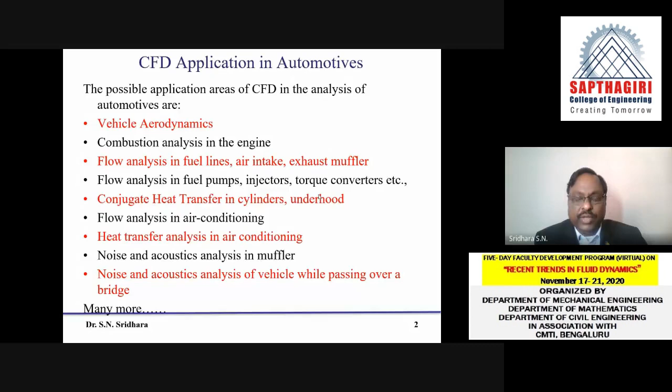I will take one by one. Now coming to what is called the vehicle aerodynamics. When I say vehicle aerodynamics, whenever a vehicle is moving in air, the interaction of the air on the body will create a lot of these things. What are those which we can actually estimate through the vehicle aerodynamics?

The first one is coefficient of drag on the vehicle. This actually says how much of the force is acting backwards, means it is pushing it backwards, and that particular drag force, when we say coefficient, I'll define coefficient a little later. This is the one we assume that air is pushing it backwards. The moment the vehicle moves forward, that drag coefficient can be determined.

The location of aerodynamic centers like center of pressure, center of positive and negative lift force, center of drag force, etc. This is something all of you will understand. Suppose I take an object and I say the mass acting at point M called CG, and we assume that is an imaginary point through which the mass is acting downwards towards the ground.

Similarly, whenever a body is moving in air, you will find that there is some pressure distribution on the body. This pressure distribution, when you take the center point of all of them and put one resultant force, it will pass through a particular center that is referred as center of pressure. Similarly, there is a lift force. The entire body can be lifted up, like in your vehicle. In most aircraft, basically the lift force is more active. Then we have the center of drag force also.

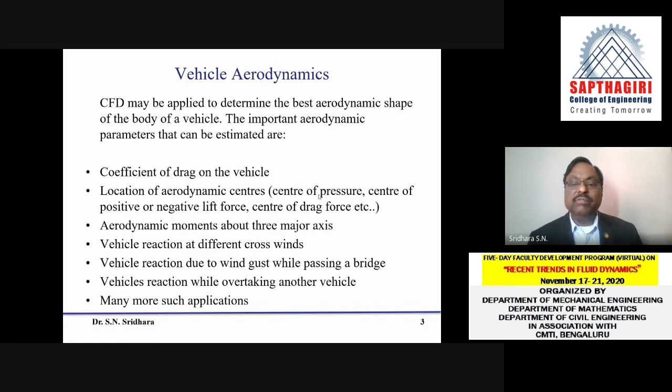Many a time, the experimentation becomes more difficult because of the cost involved. Suppose you want to use your wind tunnel, in the wind tunnel also you need to make models, and how to actually simulate it is also very complex. So CFD is one solution with which you can simulate these and fine tune it. I will take one of these.

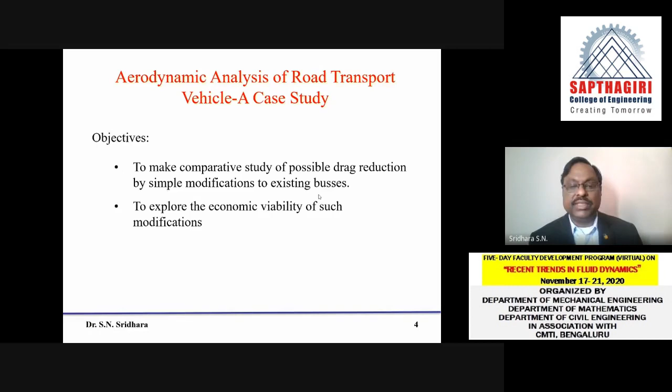This was taken as a case study, aerodynamic analysis of road transport vehicle. A case study was made. The objectives were to make a comparative study of possible drag reduction by simple modification to existing bus bodies, and to explore the economic viability of such modifications. Is it really required, and how much fuel can be saved, etc. So I will show you three models which we took for study.

The first model, what you find is a bluff body, and most of our buses are almost rectangular in shape, may have small curved surfaces, or may also have sharp surfaces like this. And we have taken one particular model. We have not considered the wheel here, and we have not also considered the effect of the road.

These two, if you add up, it will become a little more complicated. So at present, I am assuming that it is simply having no wheels here, but the wheel well - we call it wheel well. Wheel well is a cavity that is considered, because that will have an interaction.

Now what we did actually, we made a small curvature to the front edge, similarly to the top and side also, and we wanted to compare the aerodynamic performance of the bluff body with respect to the smoothened body. And similarly, we made a more aerodynamic shape in front by considering the slopes and other things. This is the bus with the aerodynamic design. So these are the three designs which we tried.

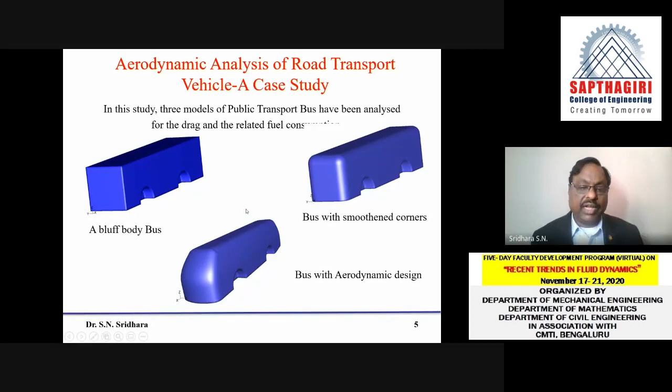Let's see one by one, looking at different types of graphs, or contour graphs. The first one I'm going to show you here is a bluff body. I've considered the bus speed is about 60 km/h, and I have drawn the velocity magnitude in kmph in colors.

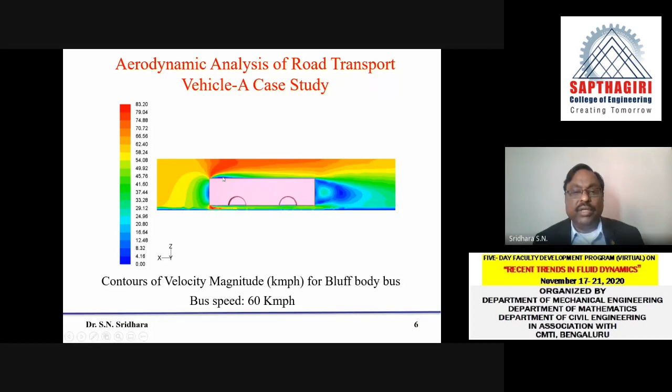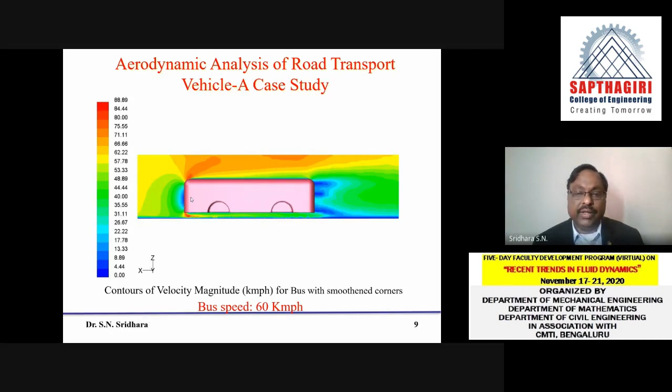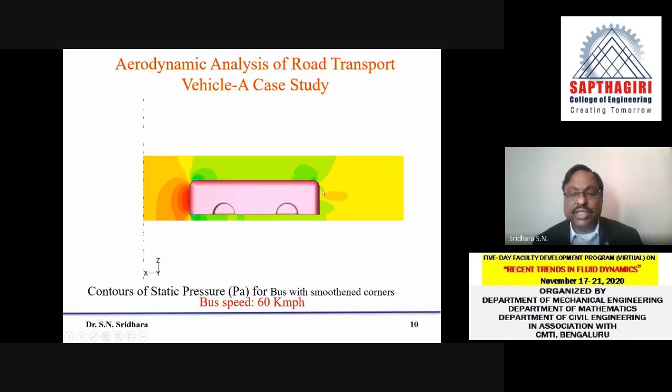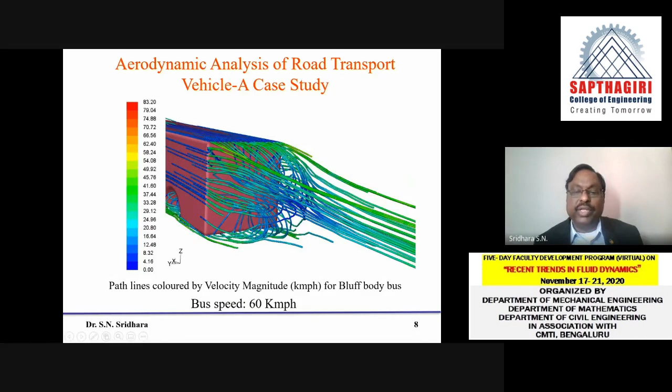But in the previous one, I will show you how it was. This was not confined very close to the body, it was away from the body, meaning the vortex body is larger. If the vortex body is larger, the total drag coming on the body will also be very high.

Now coming to the second one, this is close to the body, and away from the body it is again streamlined. Now let's take the third one, where we made a lot of changes. First, we gave a cut or inclination in the front, and this inclination ensures the air coming here tries to go as an attached flow even on the top of the bus body, and also reduces the center at which the velocity becomes zero.

That is number one. Number two, there is an undercut here at the tail. This undercut is given for two reasons. Usually in India, the bumpers are very large, so when the bus goes up the bumper, this will be coming closer to the ground, and therefore it should not rub.

But if your bus is going at very high velocity, giving an undercut here, you will find that the vacuum created is reduced to a very small region. All the remaining region, because air is coming from the back also, earlier the air was coming from the top and sides, mingling and going away. Now we are giving air from the side also, and this air drives away the negative pressure region because it tries to fill that negative pressure region, so total drag would be reduced.

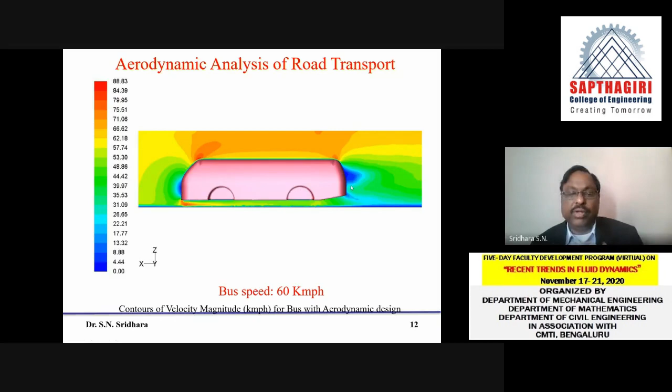Now let me see another picture, the overall static pressure. You see that the static pressure at the back is almost becoming positive now. Earlier it was not this much positive. Of course, in the front there is pressure hitting in the center, but because of this inclination, some amount of air slips over.

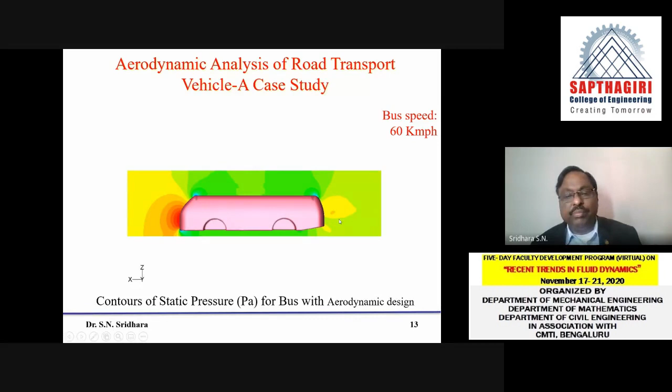Let me now look at the vortices. You see the path lines here. The path lines are so tamed, all of them are very close to the ground now, so they all come together, go to the ground, and dissipate there. The advantage of this is because the negative pressure or the total contour size of the vortex becomes lesser and lesser, the drag forces will be very less.

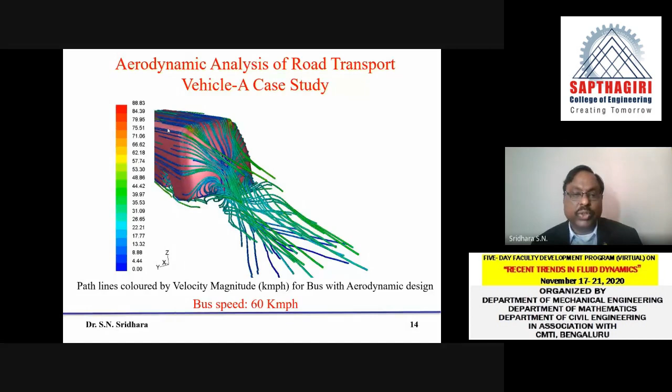We have seen only a qualitative representation of how the drag force is reduced. In fact, CFD allows us to calculate what the drag force or coefficient of drag will be. I'll show you some graphs now. If you look at the coefficient of drag here, for a bluff body, meaning without any smooth corners, the CD is around 1.61. Higher the CD, higher the drag force.

I'll repeat again: D, the drag force, is equal to CD multiplied by half rho A V squared. Half is coming from kinetic energy, rho is the density of the air, A is the cross-sectional frontal area of the bus body, and V squared is the velocity of the vehicle. So D is equal to CD multiplied by V squared, or D goes like CD into V squared.

Suppose I keep V constant at 60 km per hour, then the shape of the body determines what the CD value is. So the drag force goes like CD. If the CD is more than 1, your drag force increases by so much. For example, if CD is equal to 1, and in the next case CD is equal to 1.6, you can say the drag force has increased by 1.6 times. Similarly for 0.89 and 0.71.

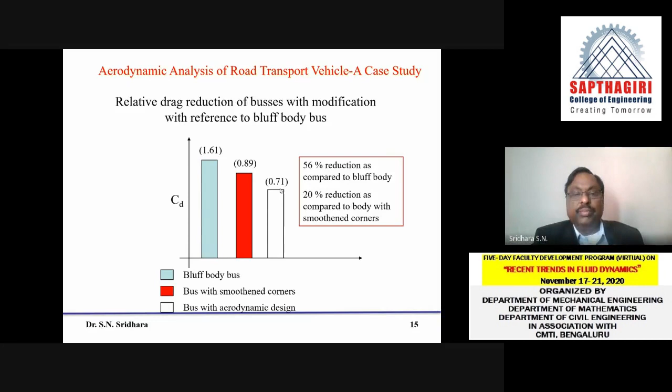Now let me see how practical it is to do this for existing buses. For that, we made a small survey with the KSRTC. This is actually very old data, and now the data has changed. I have not gone to the new data. This is around 8 years old data. It had about 5,000 buses in 51 depots coming under 10 operating divisions. So you find different types of buses here.

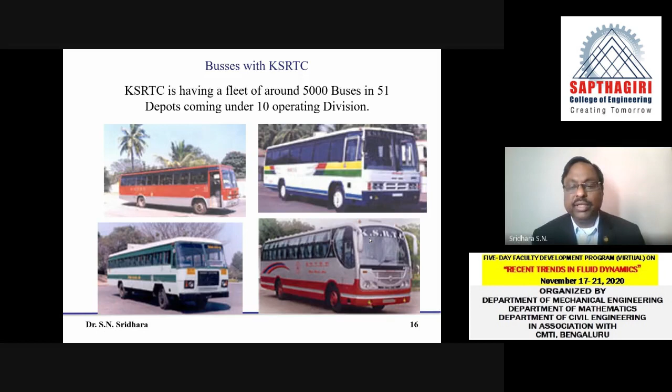Most of the buses are almost flat in the front, and there is a small bus the locals call a speed bus. The speed bus will have slightly small variation in the bus front. So there is a lot of possibility for us to give a proper aerodynamic shape. Now the question is, by doing so, how much fuel can we actually save?

I just made a small calculation. The buses of KSRTC run up to a cumulative 7.5 lakh kilometers, which takes 4 to 5 years. Even if you say there's a fuel saving of 5% due to the modification, it would mean a saving of around 83,000 rupees per bus per year at the rate of rupees 10 per kilometer, which was 8 years old data, totaling about 4.16 crores for the entire fleet. Entire fleet here means the total number of buses available in one particular depot. So if this much fuel can be saved, why should we not go for it is the question.

But when I did this particular one, we did not suggest this immediately to the KSRTC. We only said that these types of modifications could be done for existing buses, provided they are running on main roads, where there is no traffic or where velocities are more than 60 to 80 kilometers per hour. Basically, the moment you run these buses at low speeds, like city buses, which hardly go beyond 30 or 40 kilometers per hour, the drag force will not be that much.

So when the drag force is not that much, the fuel you are going to save through aerodynamic shaping will be minimum. Instead, if you try to reduce the several brakings which happen in the city, you could actually save a lot of fuel. So this is not recommended for city buses, but only for buses running long routes, going from one place to another like Mysore to Bangalore and so on.

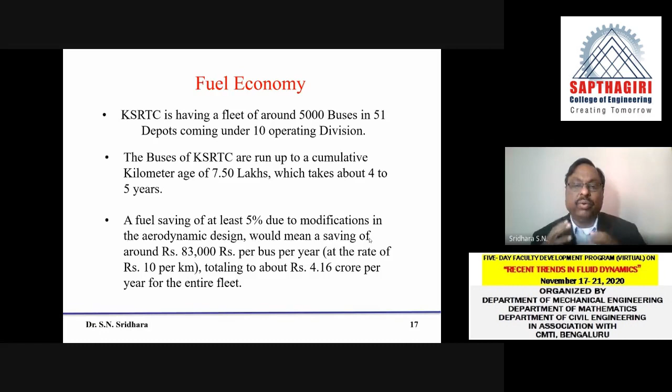I think all of you understood now how we took a physical problem, did the modeling through CFD, and from that CFD modeling arrived at the physics of the results. This is very important. The moment you get results, start thinking about the physics of it and apply it. This portion at the end of the class is going to be much more valuable for you. You learned all the theory. How do we apply it using commercial software, or write your own code, and how do you derive the physics out of it is very important. This is one case study.

I will take up the second case study. This is a performance prediction study of combustion behavior in a 4-cylinder 4-stroke SI engine. The students and faculty from mechanical engineering will understand this much better, but I'll try to make it very simple. The CAD tool we used is Unigraphics, and there are two softwares: one is called Wave, another is called Ricardo Vectis. Both are part of the simulation.

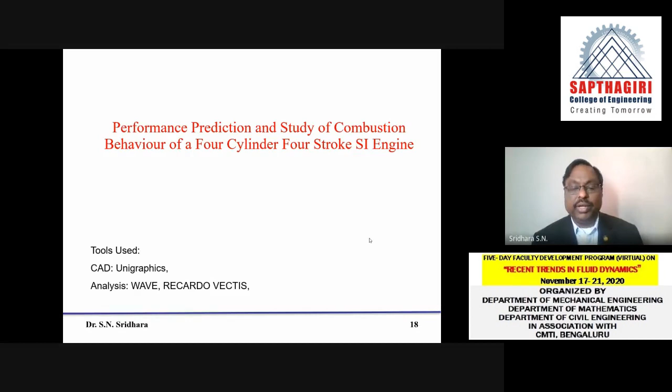Both your simulation in terms of... they use the CFD simulation as well, and also some part of modeling, mathematical modeling. This is called block modeling. What are these things and how do they operate? This I will tell you a little later.

Look here, basically what we are trying to do, we are modeling the engine. This is a 4-cylinder engine. We are modeling the engine with some physical governing equations. Those models are actually serially coupled to some of those components. See, for example, in the front, you have the air intake. I write an equation for the air intake, a modeling for the air intake to say what is the resistance, the forces or the resistance for the air to flow through this.

That's a mathematical model. Then it goes to a common junction, and there is a fuel injector, and then it goes to muffler. This is called basically the ducts, and through the ducts the fuel and air will be going into the manifolds, and through the manifolds it gets into the cylinder, it gets burnt. After it is burnt, the power is delivered in the cylinder, and then it comes out here to the exhaust gas muffler, and through the muffler it goes to the junction and then comes out. This is completely a mathematical modeling.

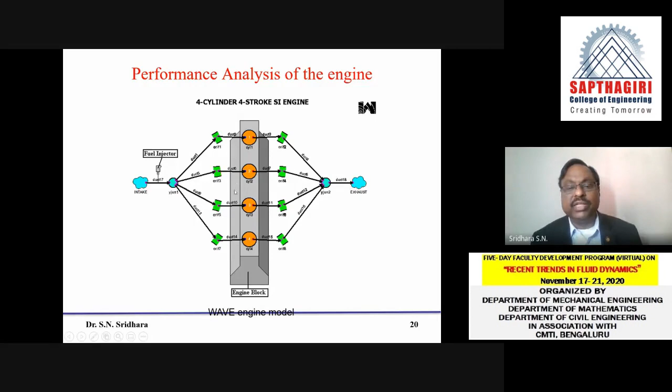Where is the CFD here? At present, CFD is not applied here. It's only mathematical modeling telling that if this is the type of the air intake duct, you are getting so much of resistance. Suppose you inject the fuel, this is how the fuel goes, and so on. This is completely mathematical modeling, and this is usually done in the WAVE. What it basically does is, the WAVE gives us the relative motion of the pistons in the cylinder, so I can find out how the velocity varies in all the ducts with respect to the crank motion. So that is the reason why we do the WAVE thing.

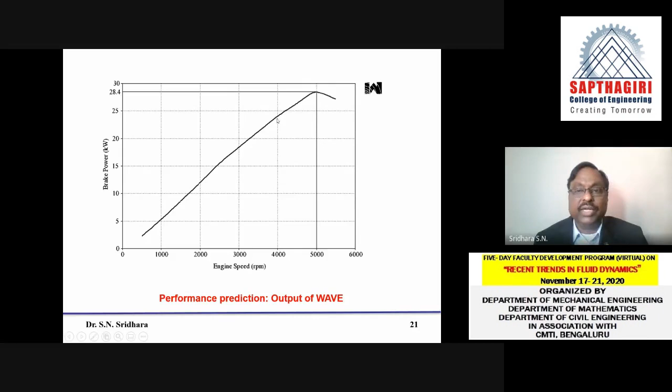And through the WAVE, if you give the parameters of the cylinder, like the cylinder diameter, the total volume, and it runs at so and so RPM, you will find an estimation of brake power versus engine speed. All IC engines will have a typical curve. It goes to peak at a particular speed of the engine, and then it drops down. And the similar thing has been shown here also. And remember, we have not done any experiment. Mechanical experiments are not done, but still we are getting this type of smooth curve. And this curve is very important for us to go a little further. What is that to go a little further?

This actually is a cylinder volume with the exhaust valve and intake valve. What we did, inside the cylinder, we scanned using laser dimension scanning meters, and that gives you the total area. That area is smoothened out using our graphics, and now you find that this is the volume of the flow. This volume has got both air and petrol together, and therefore as the piston moves from the bottom to the top, you will find there's a reduction in the volume, because there is a compression, then there is going to be expansion. So during compression, this entire volume is going to change.

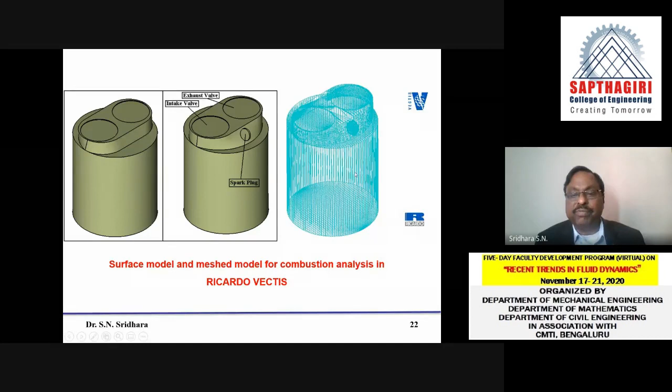You just move the piston, you simulate the piston movement inside the cylinder, and the fluid volume also changes automatically, and it readjusts the grid size and the total number of grids according to the movement of the piston. So what I have shown here is a wire mesh of it. And now from this, what do I get? I get what is called the combustion progress when the spark is given at 330 degrees. You find the very first one here. So you should see in this direction. This is the first, second, third, then 4, 5, 6, 7, 8, 9, like that.

So initially, whenever the spark is given, this is as if you are seeing inside the cylinder from the top. From the top, you are seeing the cylinder and you are given the spark. Once you give the spark, there is an initiation of combustion here. Then it starts spreading across.

So you will find that after some time, as the crank moves slightly towards the top dead center, it is going to spread. And it may spread to almost 3/4 or more than 3/4 after some crank rotation. And now the crank starts moving downwards. As it starts moving downwards, there is a small pressure drop. Therefore, the combustion which was going up will try to reduce, but still the combustion tries to spread across. And when the combustion is complete, almost in the last one, the piston would have completely expanded or taken the power.

Now, this shows how exactly the combustion is happening inside this cylinder, and this is completely the CFD component of the Ricardo Vectis. In this CFD, what equations may be there? One, the mass conservation equation will be there, the momentum equation will be there. There is an energy equation. Along with the energy equation, we have also put the kinetics of chemistry, that is combustion kinetics.

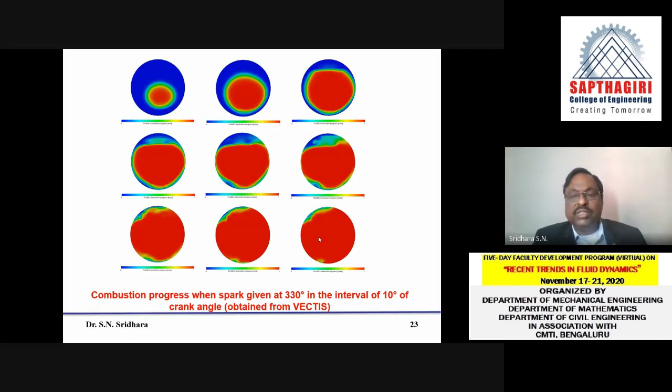Let me also give you another point adjacent to this. Earlier, people have done these types of experiments by putting a quartz window on the top, because quartz can take the pressure, and they have passed laser light across the cylinder and observed how exactly this combustion is happening. Almost similar things have been obtained, and sometimes we can even show that whatever you observe in the practical cases can be simulated on this. Then what is the physics of it and what do you do with it? We will show you that.

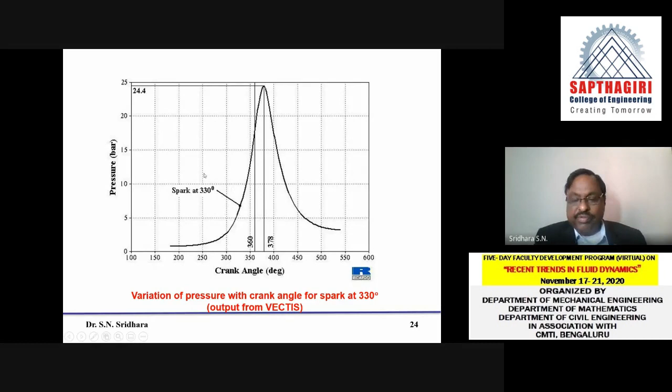This is basically the crank angle versus the pressure inside the cylinder. Usually we make it such that the peak pressure comes once the piston has crossed 360 degrees. Now suppose we made the spark come at 330 degrees, so it has come slightly away. This is required. We should not always be exactly at the top, otherwise it may even fire backwards. Now let us see what will happen if I advance the spark.

Now when I advance the spark from 330 degrees to 320, 325, etc., you will find that the pressure inside the cylinder keeps on increasing, and after one point there is a pressure fluctuation inside the cylinder, which is called a knock. Knocking should never be allowed inside a cylinder, because knocking represents pressure waves which are oscillating violently, and the entire cylinder and piston can break down. So that's the reason why knocking should not happen.

So it shows that if you try to advance the crank angle away from the center of the 360 degrees, then you are going to get a different type of pressure variation. In fact, if the pressure is very low, it is very much lost, because the combustion is not complete. You are simply letting out the exhaust gases. If the pressure is at the peak, it is always better. But don't increase it to such an extent that it goes to knock.

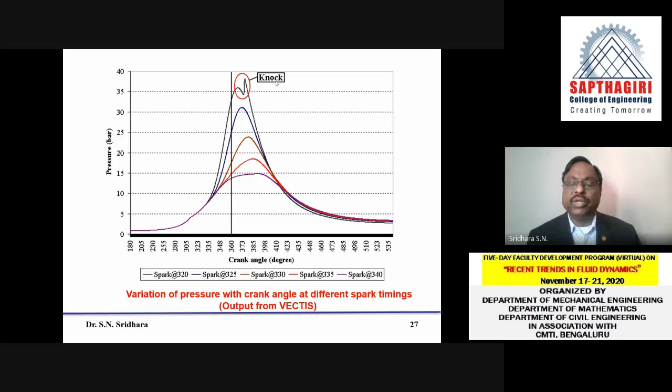Now this CFD has given me an idea of what should be the spark angle for having an optimum pressure inside the cylinder. This can be taken directly to the experiment to make sure that at that particular speed of the vehicle, the spark plug initiates at that particular crank angle. I think it is very clear for all of you. This is a very important thing.

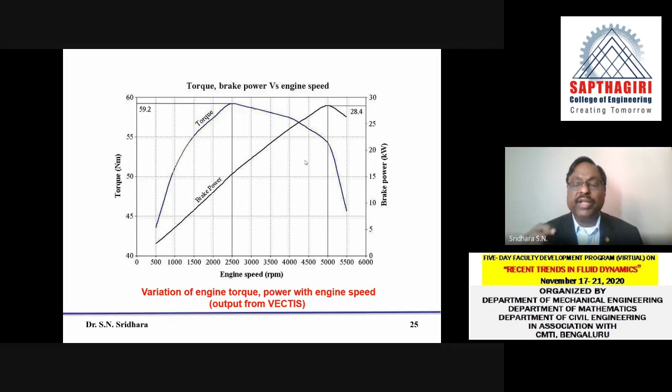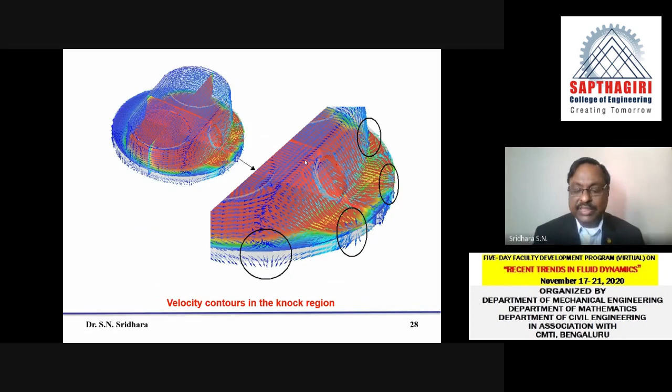Now the next point is we wanted to see how exactly it is happening inside. So we also have drawn the velocity contours. These are the velocity contours in the knock. As I said earlier, there are going to be severe oscillations of pressure waves inside, and that can be seen when you take momentary graphs. These are quite interesting. Now this is what I said about the conclusion.

Now another one, this is a very important parameter that we usually see: studies on the airflow behavior in an intake manifold in a multi-cylinder SI engine. I will try to explain what you mean by, first of all, manifold, and what you mean by multi-cylinder SI engine. An SI engine is a spark ignition engine.

What is a manifold? Suppose in an engine you have got 4 cylinders. All these 4 cylinders are connected by ducts to a common passage, and that common passage is called the manifold. The air has to enter through the manifold, then to the ducts, and then to the cylinders. And many a time the injection will happen inside the manifold, or it could be happening in the duct also.

Now, what are the tools we used here? For the graphics, we used CATIA V5 R11, and for analysis we used again Ricardo WAVE, VECTIS, and also Fluent coupled to that. Ricardo WAVE gives me the velocity variations; it's a mathematical model. VECTIS gives me part of the CFD calculations. Fluent is coupled with that to find out whatever I require. Now I'll show you this.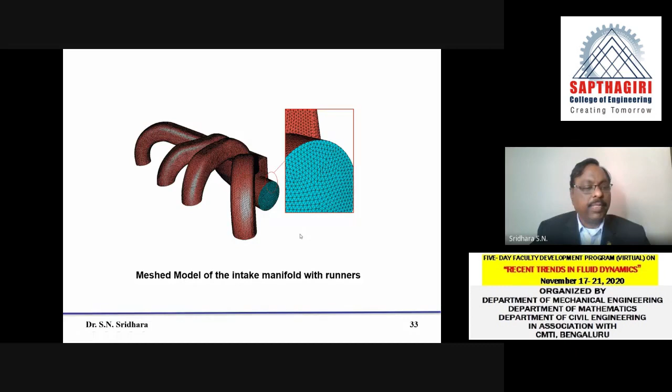Now we did a modeling, and this modeling is a little complicated. We put in all the components of the engine, including the intake manifold, the ducts, and so on. These are the junctions you find. This is the 4-cylinder block again.

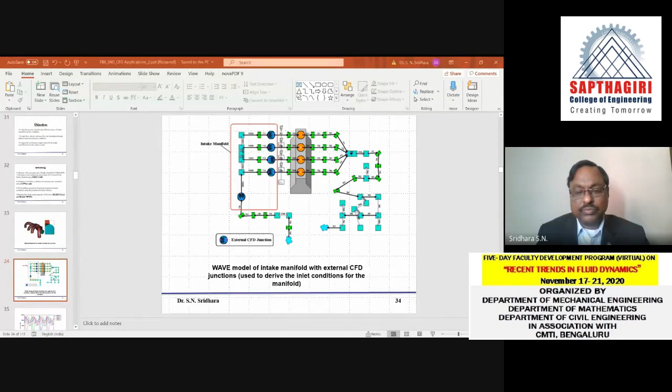Just a minute. Just a minute. I will come back again. Just 1 minute. Sir? Hello? Sir, I'm in a webinar. If you don't mind, can I call you back?

I'm sorry, there was a call there, so I had to take it immediately. I'm sorry for it. I will go back again to the presentation. I'm very sorry. That was an important call, so I had to take it.

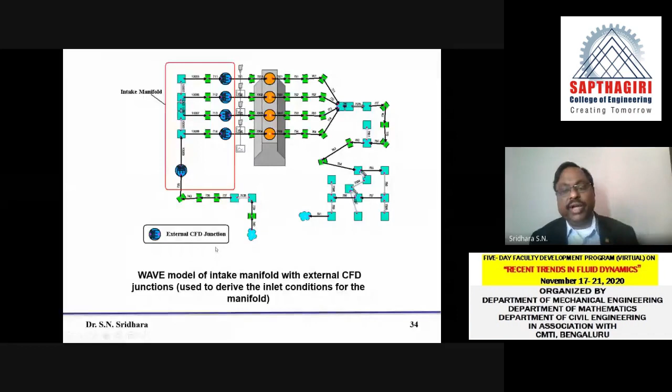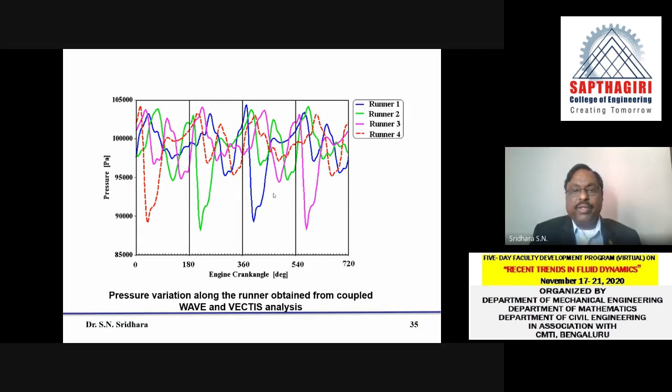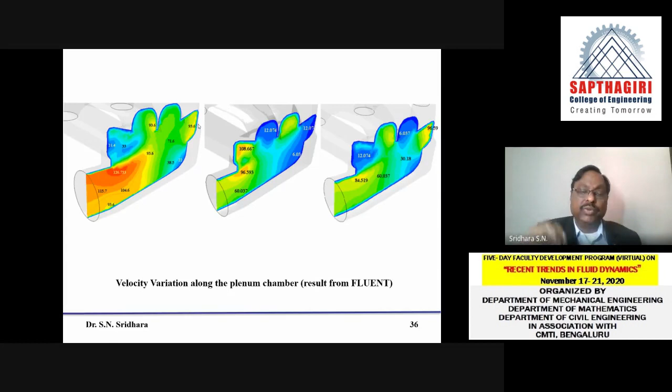So the velocity variations are found by blocking many of these and then opening any one of the runners. This actually simulates the inlet valve and the exhaust valve, which are actually blocked and opened up. So that is what we try to find from this. This actually shows whether every valve is getting uniform fuel, etc., or not. Okay. Now this is what we find here.

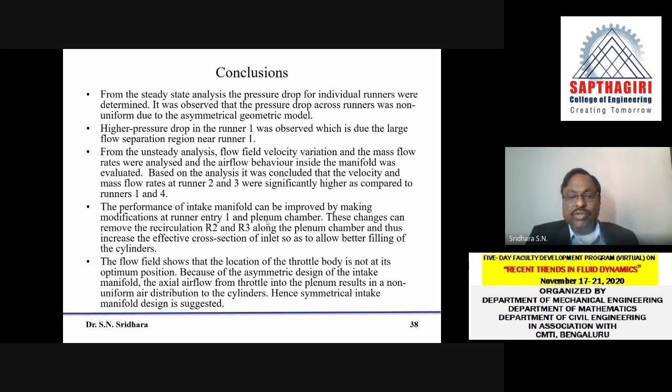Now, if you ask me did we suggest some change, yes we did, but that project, which I'm not showing here, is in the industry now. What we did actually is change the angle, the approach angle of these ducts. When we made that approach angle, each duct should be loaded equally. That is what we did in the next project.

Now the question is, how did we create this geometry? Anybody can ask this question. What we did actually, we bought this from one of the second-hand markets, the entire manifold with the runners. These are available, we call it Gujri. From the Gujri we got it.

We cut open all the sections. After cutting open, we measured it using our laser scan meter, and then we got roughly the size of it. Then we put it into the graphics software and clean it up. Once you clean it up, it becomes a complete solid, and the fluid volume space. This fluid volume space, or the air space, can be used for computations later. This is all the work involved actually. This is how we should move towards practical cases.

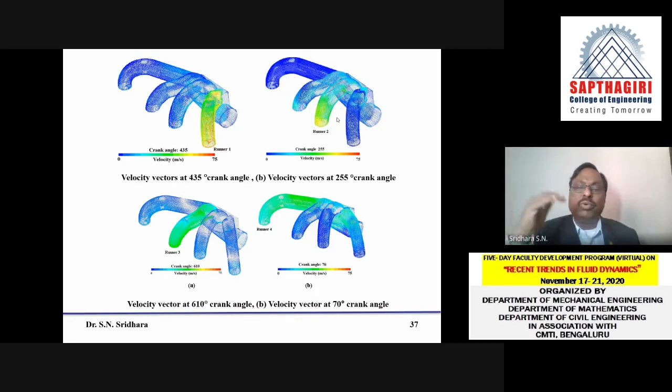Now, some of the conclusions I'll be sharing a little later, so not very important. There is one more thing. I think torque converter I will not take, it's very, very complex. I will take up another one.

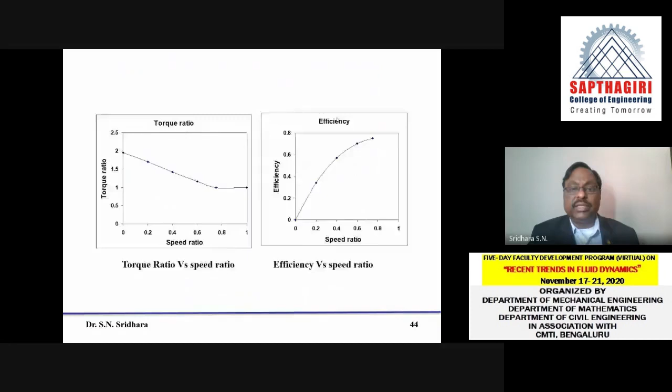What we are trying to do is: whenever there is combustion happening inside, how the heat is transferred to the block, and from the block into the coolant, and the coolant absorbs this heat and then goes to the radiator. In the radiator, it gives out heat to the atmosphere and then comes back again. This is mainly because you have very high heat produced inside the cylinder, and therefore you need to take out this waste heat and reject it to what is called the atmosphere.

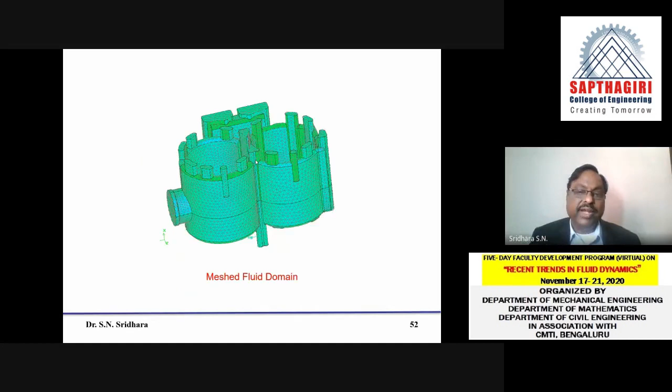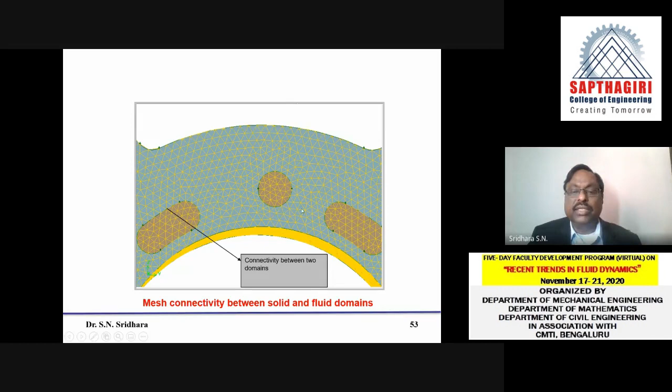When I apply boundary conditions in terms of the maximum temperature coming through, that is sufficient for us to understand how the heat is being absorbed. So now what you find here, for the twin cylinder, only the fluid volume is taken. This is the fluid volume extracted from that particular diagram. Now when you go closer, these are the type of elements which we use. These are the passages, the water passages through which the water is going, and this is what you find here. Next, we did conjugate heat transfer analysis.

What is conjugate heat transfer analysis? It is nothing but conduction and convection coupled together. For example, inside the cylinder there is a hot gas. This hot gas gives heat to the cylinder surface through convection as well as radiation, and then at the surface again it conducts.

As it conducts, it goes to the liquid, and the liquid will have convection again. So conduction and convection together is usually called conjugate heat transfer. This process is called conjugate heat transfer.

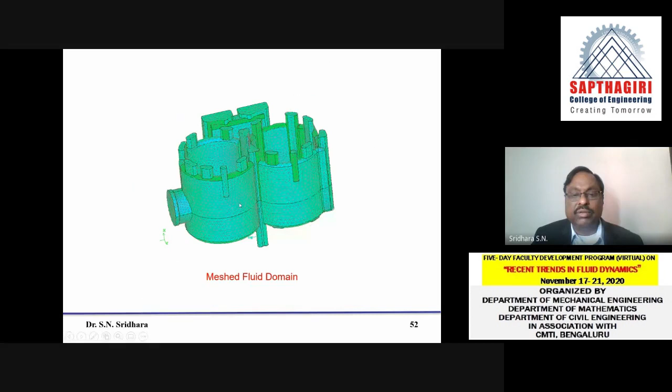What we did was cut the sections of the cylinder at different places. As you can see here, this has been shown with different sections, like a section at 1/4, half, 3/4, and so on. This is how it goes.

When we apply only the inlet velocity without applying any heat, what happens to the velocity ranges? This is what we see. Because it is completely molded or casted, nobody can control the velocity of water with which it goes in. It takes the least resistance passage. The liquid or water inside this coolant passage will take the least resistance passage, so you find different velocities going through it.

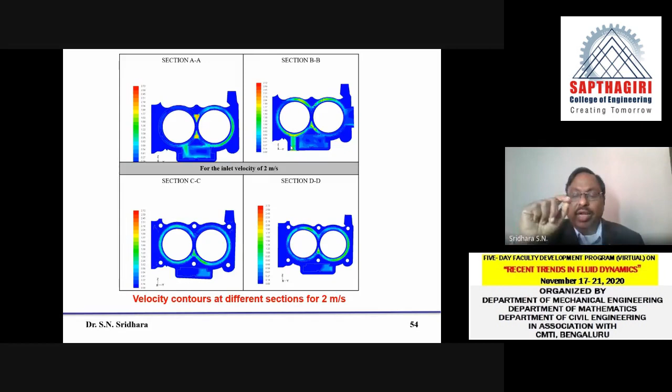Now, after observing this, we apply heat to the cylinder wall. If I know the cylinder wall temperature, I apply it as a boundary condition, and then watch how exactly this heat is transported through the liquid. This is what happens here. You find that the inside temperature is very, very high.

It's around 448 Kelvin. That particular temperature outside is very, very low, because it could be almost like 100 degrees centigrade or less, since the coolant water boils at 100. So at most it could be 80 or 90 degrees centigrade at atmospheric pressure. So you find there is a lot of thermal gradient between these two. The thermal gradient is very high temperature inside and very low temperature on the other side.

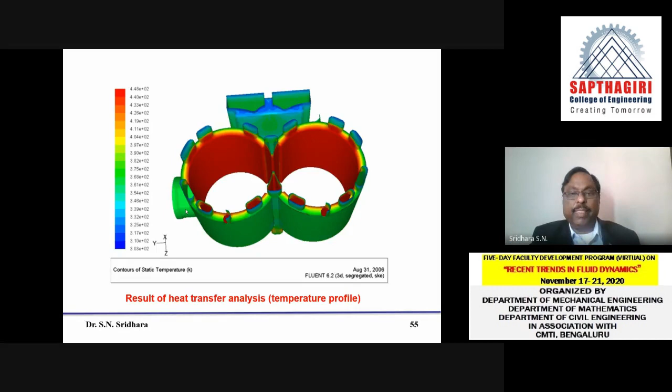Now I'll show you the temperature gradients, how things are going. This is the wall, at the wall you have 448 Kelvin. At the end, you are going to have 369 Kelvin, which is referring to the wall on the other side. In between, it is even lower, around 325, etc. This is where the air passage, water passage, is flowing through.

This study gives us an idea of how exactly we are carrying the heat produced inside the cylinder through these coolants, and how the outside cylinder is kept almost at a temperature not very high than atmospheric temperature. When the engine is started, usually the heavy cast iron block also gets heated up. If your cooling is much better, the temperature should not go beyond 100 degrees centigrade, or even 70-80 degrees centigrade. That is taken care of by your coolant.

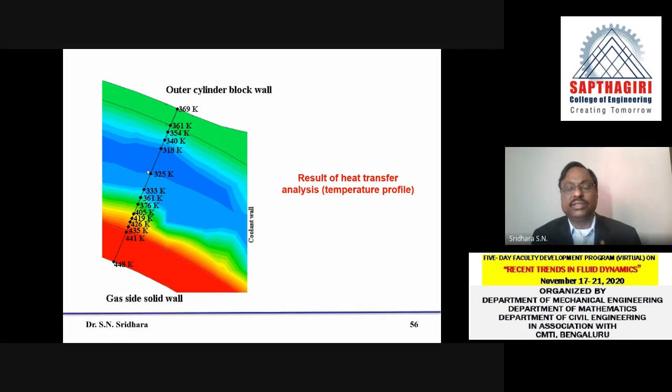The complexity of this calculation is understanding what the passage is, number one. Once you actually cut it open and look at the flow rate inside etc., you will be seeing the other side of it, something like this. So this is how it goes across. Those variations are shown here with flow velocities and so on. This is what I wanted to show.

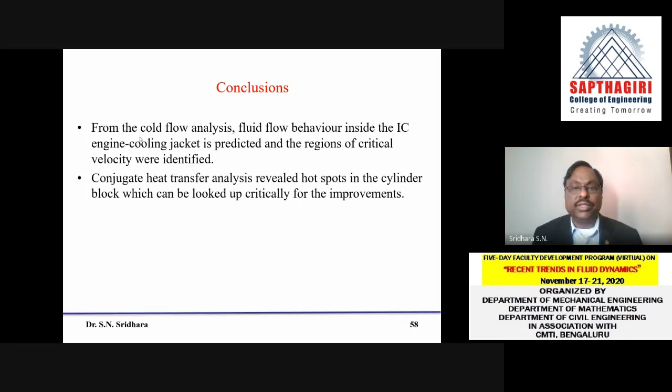From the cold flow analysis, the fluid behavior inside the IC engine block is actually seen, and conjugate heat transfer analysis is revealed. Now, because time is very short, I will go through some interesting case studies and then leave it open, since it's almost 12. I think you have your other concluding session. So I'll just take some of the other important things.

This, I'll just explain. This is basically the car passage inside where the passenger and driver are sitting. We are trying to find out how the entire car gets cooled because of the air passages and how these air passages affect it. This is the entire liquid space or volume space which we are going to consider.

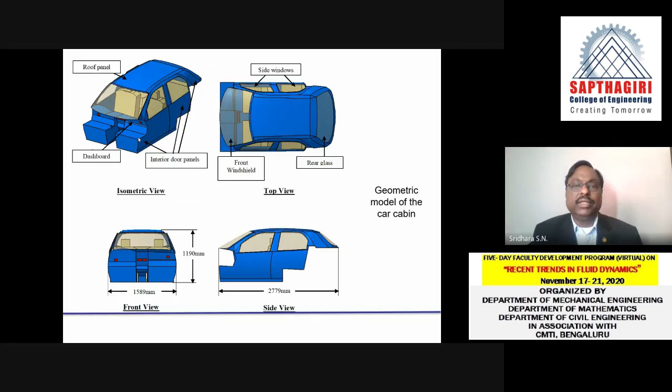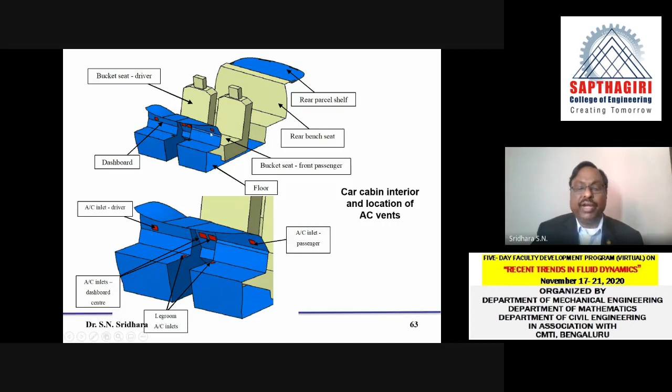This is the inside part of it. We also considered, suppose there's sun on the top, in the front, or in the back—there's radiation heat coming in. Now, these are the dashboards. At the dashboard, the driver and co-passenger sit here, and the rear end passenger sits here. There is a passage for air, exhaust in this direction. So you can find these things over here. That is what you find. Now I'll show you some of the results directly without even telling.

This is when the sun is on top. Because the glass at the rear and the glass in the front are inclined, you find the radiation heat entering in, so there are some places where it is getting heated up.

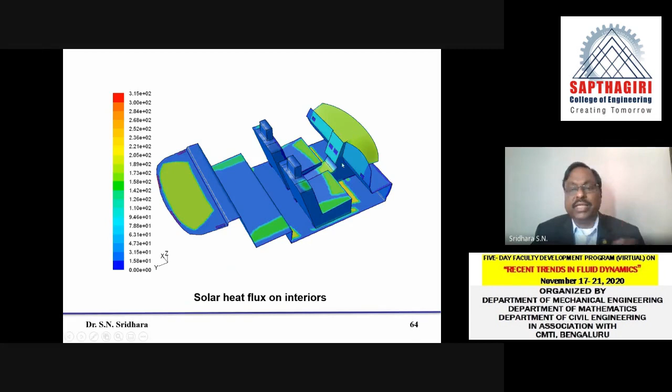Now what we do is take the flow rates. Without passengers, we give cold air and see how this cold air circulates and what the temperature is inside. Similarly, when passengers are there, we see how it circulates inside the passage, how the distribution of cold air is done, and how heat gets added because of the body. Similarly, the temperature of the sun, everything is taken care of.

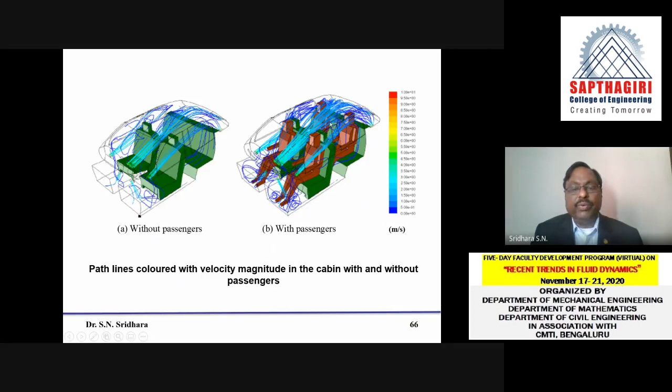Next, what we do is change the incident angle. You can see here, for example, when there is no passenger, the maximum heat is coming almost at the front end of the glass, mainly because it gets accumulated here, and because sun rays are coming in directly.

On the other hand, the moment a driver or passenger sits here, the temperature slightly increases. Why? There are two reasons. One, there is continuous heat input from the passengers into the system, so the heat has to increase. Two, because of this, the accumulation of air on top gets more concentrated, and because of that you find this type of heat increase.

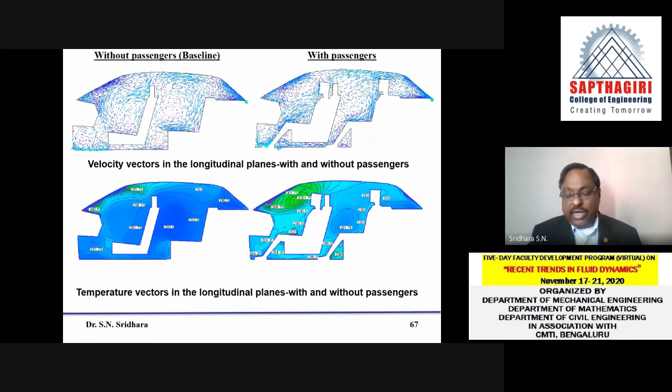Similarly, we try to find out what happens if the AC vent is at 15 degrees versus 30 degrees. At 15 degrees, everything is going good, with only high temperature somewhere in the corner. Whereas at 30 degrees, you find the temperatures are very high far away from there. So this is what usually happens at the other end.

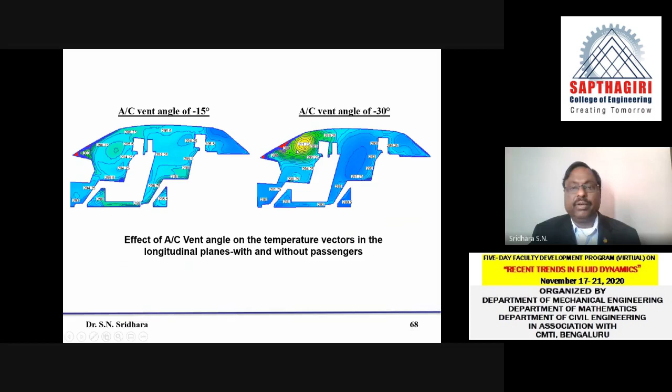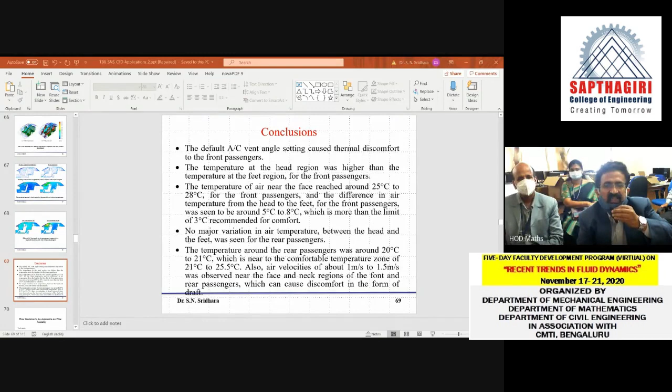And we are very happy that in spite of your busy schedule, you are with us. The participants have taken a lot of knowledge about the subject, and we welcome you once again for this valedictory session. I also thank the Department of Mechanical Engineering, Dr. Madhav Swami and his team, and Dr. Markandeya, Department of Mathematics and his team. I am also very thankful to Dr. Manjunath, head of the Department of Civil Engineering, and his team for organizing this 5-day FDP program. It was successful, more than 200 students participated and took a lot of inputs about recent trends in fluid dynamics. So with this, I congratulate them for this successful moment. And sir, once again, I am very thankful and welcome you for this valedictory session. Thank you very much, thank you for inviting me.

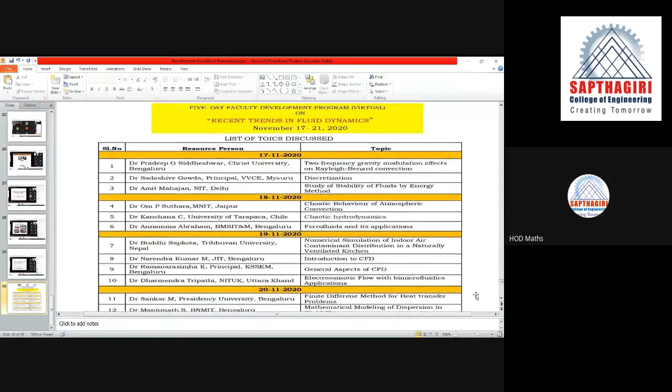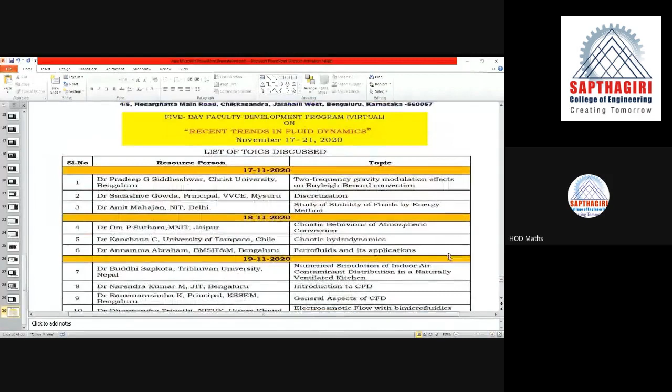So it started with, we requested CMTI to be our associates, and they agreed immediately. So Department of Civil Engineering, Department of Mechanical Engineering, Department of Mathematics, in association with CMTI, conducted the FDP. It started on November 17 with the inaugural session. The chief guest of the inaugural session was Dr. Nagahanumaiah, director of CMTI.

The same day, it started with the keynote address of Pradeep G. Siddheshwar on two-frequency gravity modulation effects on Rayleigh-Bénard convection. Then Dr. Sadashive Gowda, principal of Vidyavardhaka College of Engineering, Mysuru, on discretization. He considered the Navier-Stokes equation and the continuity equation, and discussed discretization. Then Dr. Amit Mahajan from NIT Delhi discussed study of stability of fluids by energy method.

Then Om P. Suthara from MNIT Jaipur discussed the chaotic behavior of atmospheric convection. Day 2 was on chaotics. Dr. Kanchana from University of Tarapacá, Chile, presented chaotic hydrodynamics. Dr. Annamma Abraham from BMSIT and Management, Bengaluru, talked on ferrofluids and its applications. Dr. Buddhi Sapkota from Tribhuvan University, Nepal, discussed numerical simulation of indoor air contaminant distribution in a naturally ventilated kitchen. It was a nice lecture.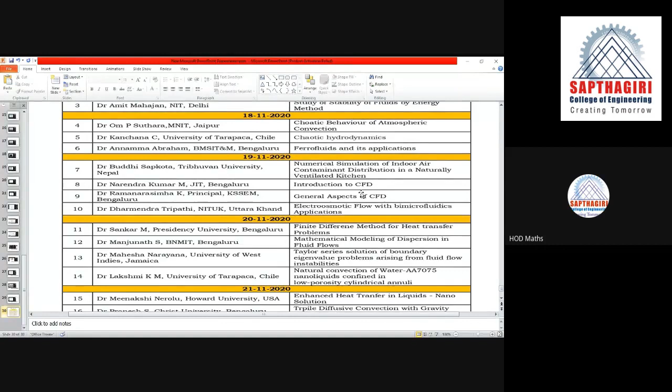Dr. Manjunath from BNMIT Bangalore talked about mathematical modeling of dispersion. Dr. Mahesha Narayana of University of West Indies, Jamaica, talked about simple Taylor series solution. I think most faculty know about Taylor series solution of differential equations. He used that simple technique to solve boundary eigenvalue problems arising in fluid flow. Dr. Lakshmi K M from University of Tarapacá, Chile, talked about natural convection of water.

Meenakshi Nerolu, today morning, it was midnight for her. Even then, she said she will present live. I wanted to relay her lecture in her absence, but she wanted to go live. Even then, she gave it. Dr. Meenakshi Nerolu from Howard University, USA, talked about enhanced heat transfer in liquids. Dr. Pranesh from Christ University, Bangalore, talked about triple diffusive convection with gravity modulation.

And last but not the least, a very nice topic and very nice lecture from Dr. Sridhar S.N., Amity University, Gurugram, on application of CFD in automotive design. So 17 lectures we were able to arrange, but we had many more. I could not accommodate them, because giving lesser time to the speakers is injustice to them. I had another 5 to 6 faculty in the pipeline, but we could not give them slots.

Certainly, we will arrange a similar kind of thing in the coming days. We want to go offline when the pandemic comes to an end, and we'll certainly invite all the resource persons and make it a mega event. So with these few remarks about our FDP, I'll hand over the session to Sridhar for his chief valedictory talk.